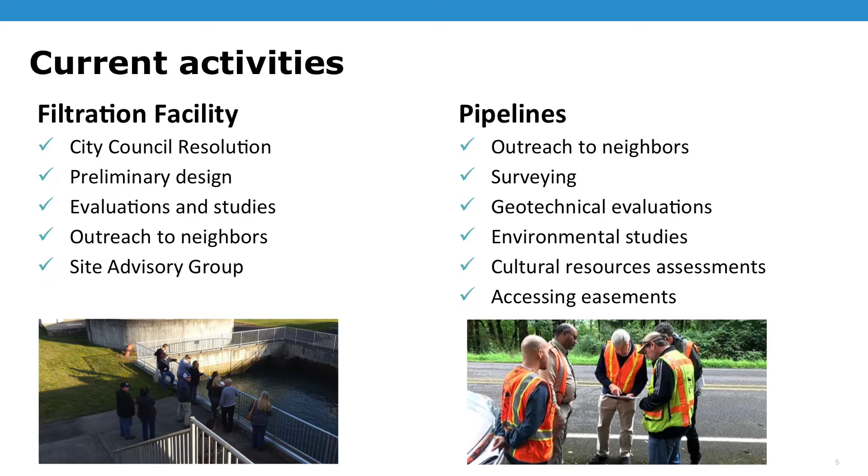So you may be aware of a number of the current activities on the filtration. As we've been out talking to a number of you, been in many homes talking about these activities, getting out doing geotechnical investigations, which are part of our evaluations and studies. We're doing the outreach. We've created this process to have your thoughts and input into our design, and we're getting ready to start our preliminary design.

So those are all topics that have been started over the past year, and now we have the opportunity to get into the actual design. That's the process now that we have the design contract under our belt, that we'll be able to begin to talk to you.

What we've been doing to prepare for an earthquake is creating a backbone. By putting these facilities, the pipelines and the treatment plant will be built to seismic standards that will withstand the major earthquake, giving us a section of our system that will be able to withstand that. Our goal, in the long run, is to meet the goals of the Oregon Resilience Plan, to have water back in that backbone within 24 hours of a major event. So these systems will be built to be able to provide that.

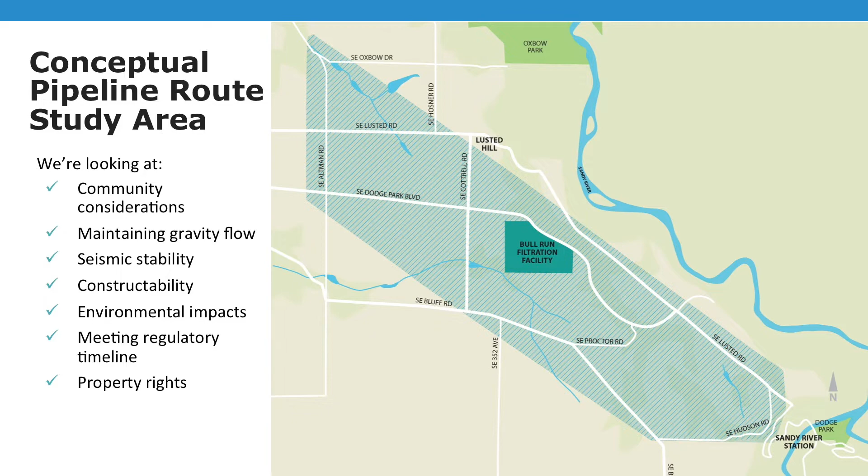I think that's... is there one more slide? Nope, okay. Do any of your pipeline alternatives involve property you don't have easements on currently? You've got several alternatives you're looking at. Do any of them go through land that you don't have an easement on? Potentially, yes. So I'm sure you've already connected with people that could be affected by that. Have you already talked with those people?

No, not all of them. Why not? We're still evaluating alternatives at this point, so we have not made any final decisions on where the pipes are going. We're trying to figure out what the best route for those pipes is. It's not exactly part of the process then, is it? You're not making the people part of the process, just hearing them after you've decided what you're going to do. No, we're here tonight to hear people's concerns. We'll be doing this for several more months before we make any final decisions on where pipe routes go.

This flyer went out with the idea that this is the group we want to connect with, so folks will be coming out and meeting with those individuals, talking to them and getting more information. We will be scheduling meetings with people to talk to them about getting on their property individually. Benita and I will be out talking to property owners. So nothing is set at this point.

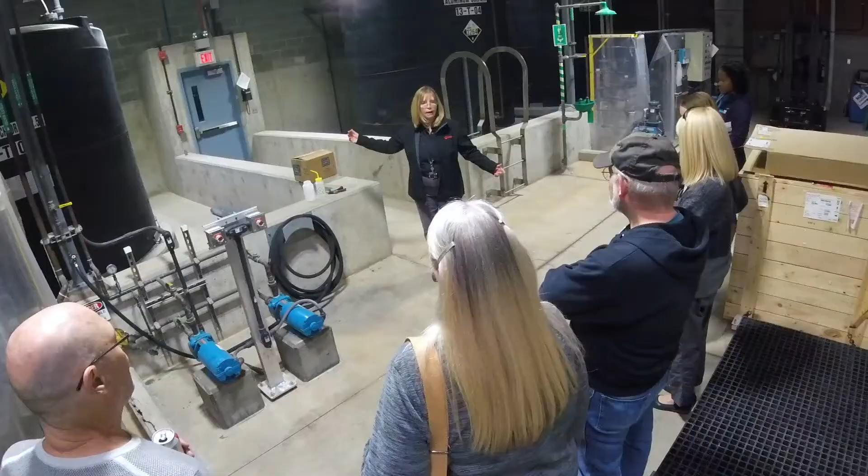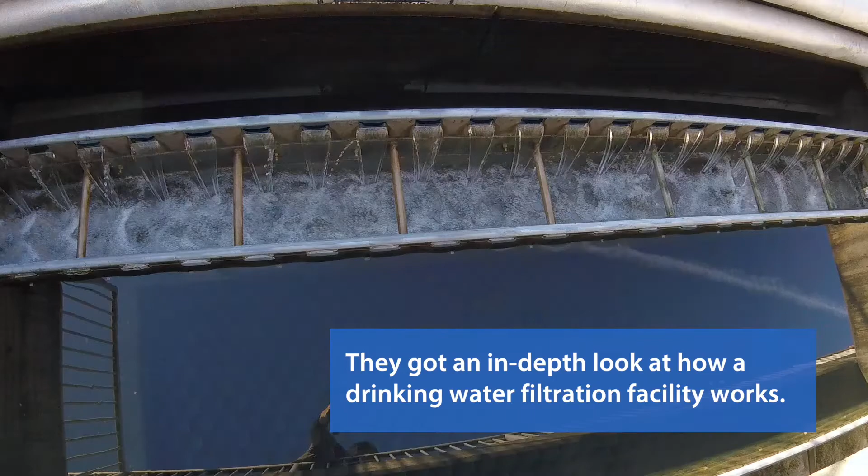Okay, so 1, 2, 3 of you. I don't know if you've seen these photos yet, but you may have. Maybe it was obvious, maybe it was just a little covert action here, but there is a very short video of some of you walking around that facility - this happened in November, is that right, Jude? Okay, and a number of you were there. Some people not currently with us tonight were also part of this conversation and introduction. So what I'm curious about is, as you refresh your memory about being there - it looked like a glorious day in November - what came to mind? What were some of the impressions you had leaving that conversation? Charlie, let's start with you - what was your reaction to this?

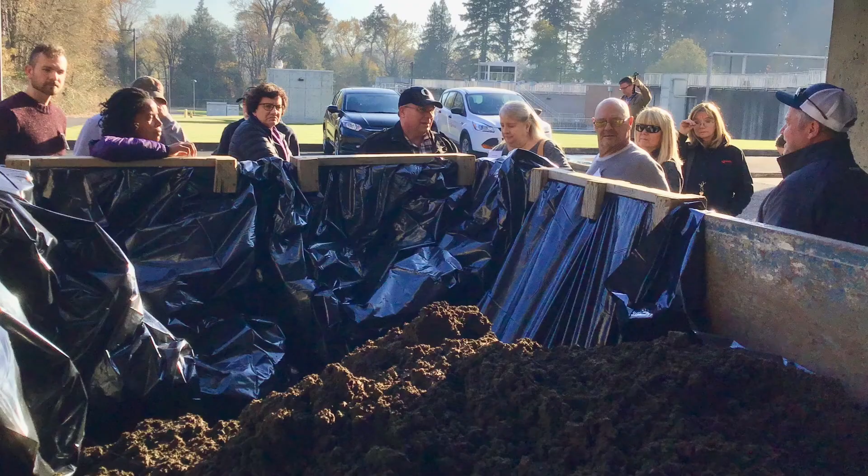This was a treatment plant that was kind of necessary. The things we were trying to highlight here were how to capture the neighbors' concerns and integrate that into the design, so people could understand how your input can influence the look and feel of this. I'd say the one thing I remember from my first meeting with you all was that you were sick of seeing the pretty outside of this thing. You wanted to see the inside, like show us what's inside this, over the fence. I think that was good, and people generally had a good opportunity, as Charlie said, to kind of see those things.

I think the look and feel of the plant that will be your neighbor can be very different than this. This was an attempt to bring people in and draw people to a park, have a water feature and public amenities that would draw people in. It doesn't sound like that's what you guys wanted to achieve through your input as part of this process, but again, it's just an example of what you can actually have input on and an impact on in terms of the water treatment plant.

Okay, great, let's go one step further then. Benita, I'm going to look to you to help with this. So there is a plan, as Jude inferred, to actually have another tour, likely on the 13th of February. And that was a date, right Benita, that this group thought would be an appropriate date to do? Yes, that's correct, February 13th, right before Valentine's Day.

And the idea is, the mechanical or logistics perspective of that is what? What's the plan for now? Well, we wanted to get an opinion on whether you wanted to look at something that was more similar in size to what our facility will look like, or if you're interested in looking at something that would be more similar in design. So we have the Joint Water Commission treatment plant, which is in a rural area, and that's what this one looks like. It's out in Forest Grove. Is that right? A little bit further than that.

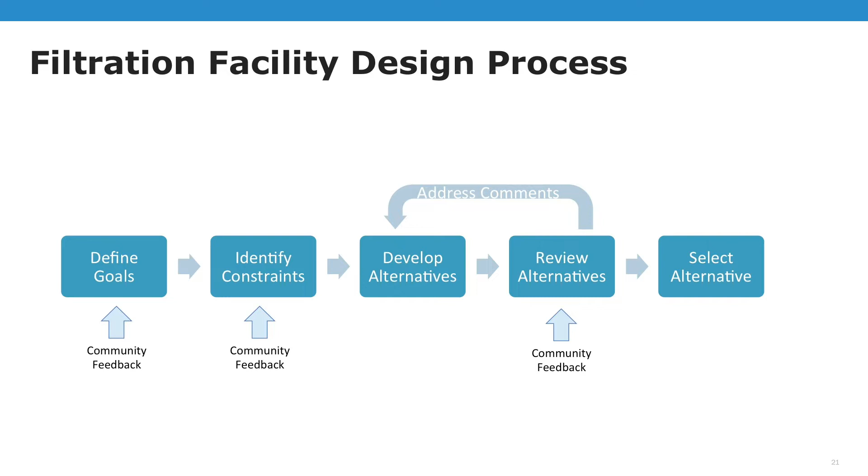The general design process we work through is both linear and iterative. We always start with defining the project goals. Dave talked about some of the overall project goals established at the start of the project, in terms of the values we bring to protecting the waters, the community, and the environment. At that point, the Water Bureau went out and got feedback from the community at large on the goals for Portland's Water Bureau's water supply.

We then work to identify the constraints: legal, regulatory, environmental, geotechnical, and community constraints that will influence the overall design. Then we move into developing alternatives and reviewing them, taking community feedback as we review the alternatives and iterate through that process, coming back if necessary to identify additional constraints with community feedback. Ultimately, iterating through that process, we end up with a selected alternative.

This is a very generic design process that works on the big scale with the overall project, and that we walk through on the small scale, even for medium-sized decisions. We'll talk a little about how we work through this process for one of the major decisions on this project: what the site layout looks like for this facility.

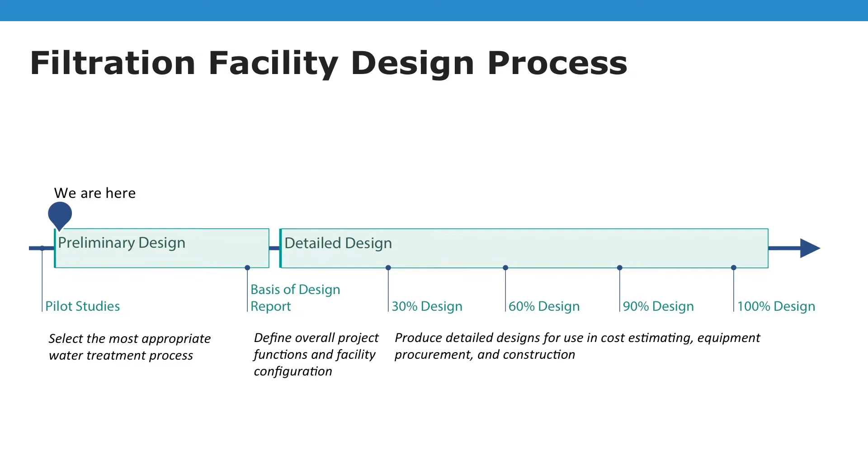The filtration facility design process is made up of two primary pieces: preliminary design, which we're just kicking off and will last about a year, as you saw in that schedule, and then detailed design. Below each bar you see in light blue the deliverables developed as part of this: the pilot study work that's ongoing now, the basis of design report, incremental design developments as the design evolves, and ultimately 100% design documents.

We're going to talk about each of these phases and a bit about what we're doing behind the scenes to make decisions, when and how we can solicit input from you all, and when we can answer the questions you've been asking that we just don't have the information to answer today.

The first phase I mentioned is the pilot study. The pilot's been up and running now for about six months. Pilot scale water treatment is really just a physical model of what the water treatment process is going to look like, with lots of dials to turn and bells and whistles so you can figure out the most optimum and efficient way to treat this water moving forward at the full scale.

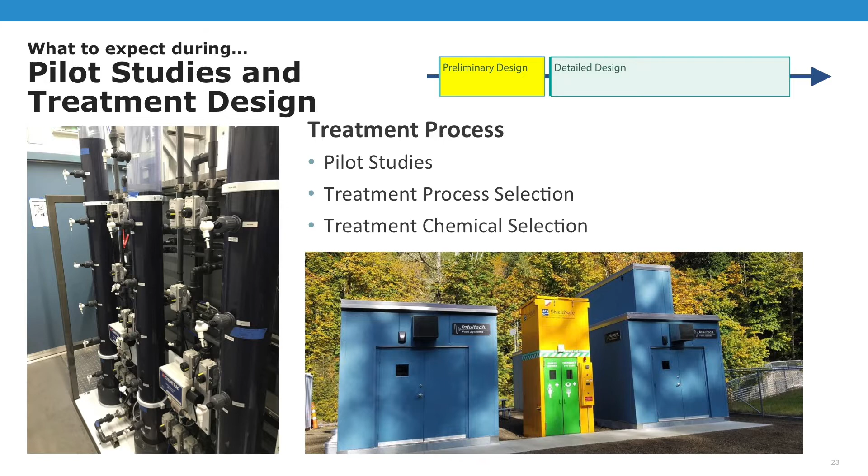These are a couple pictures of the pilot scale. It's literally located in these two blue containers with a safety shower in the middle. But if you open the door and peek inside, you'll see things like these pilot filter columns — 6-inch diameter filter columns that act just like the larger filters that will be built at the full-scale treatment plant.

Pardon me? We do have chemicals and things out there, so we want to protect the operator's health and whatnot. So yeah, if something happened, they'd have something there to wash their eyes or whatnot. Where are those located? Up inside the Bull Run watershed.

The types of things we're going to develop and determine as part of the pilot study include the water treatment process. We talked a lot about the different treatment processes, but there are all kinds of nuances with those, so we're going to iron out exactly what this treatment process is going to look like and demonstrate that it can treat water throughout a full year.

We're also going to select the chemicals we'll be using at full scale so we can understand the chemical doses, which equates to how many truck trips of those chemicals, as well as how many solids those chemicals produce and the solids we remove from the water — how many truck trips of mud we're going to be hauling off this site.

If you were using UV and/or ozone, like other major cities on the West Coast, how many truckloads of crap would we have to haul out?

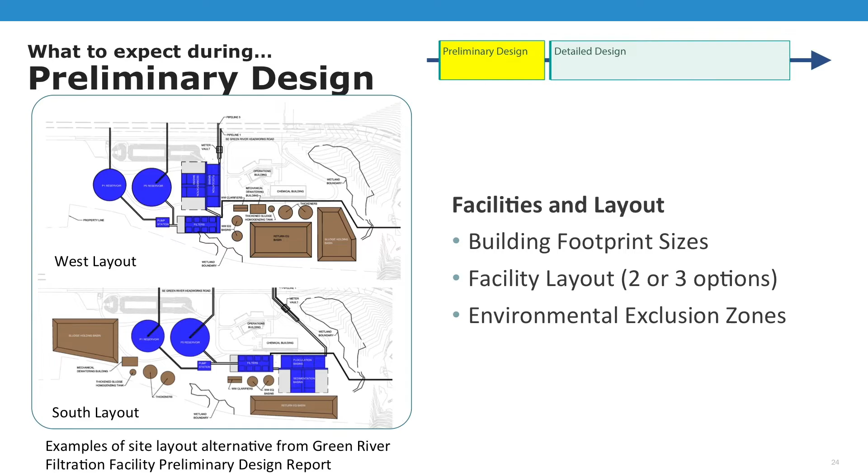As we move through the design process, especially during preliminary design, one of the key decisions we're going to explore is how we lay out the site. I've got a couple of examples of where we ended up at the end of the preliminary design process for the Green River filtration facility, a facility similar to what we're proposing here in Portland. Looking at two very different site layouts, but both fit within the same constraints. Both layouts had all the same facilities, just arranged a little differently. They both avoided the wetlands on site and stayed within the property boundaries, which are kind of washed out in the slides as projected.

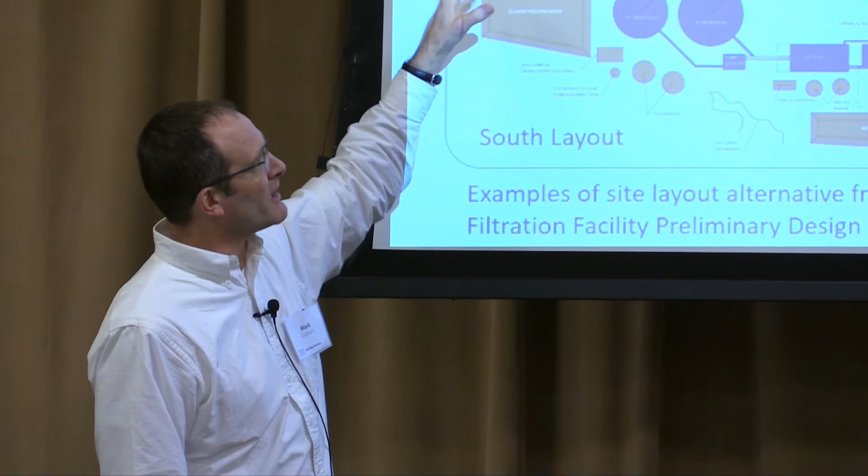So as we walk through the process of doing a site layout for this project, just like the generic design process we showed before, we're going to identify the constraints, where our environmental exclusion zones are, our goals, what our building footprint sizes are, and what we need to put on the site. We'll end up with two or three options for the Carpenter Lane site that fit all the facilities we need, which we can continue to discuss and optimize as we move forward.

Mark, yes ma'am, the Green River site—is it on 25 to 30 acres? Yes, I think that's what it was, I think it was 30 acres. It's at the headwaters of the Green River project, which has a smaller dam than the Bull Run project, correct? Yeah, it's just a small diversion dam, not a storage dam—the diversion feeds the Green River filtration facility. Behind that, higher up, there's a storage dam operated by the U.S. Army Corps of Engineers. It's also gravity fed, 42 to 46 miles to the city of Tacoma. Yeah, that sounds about right. Okay.

I feel like I'm getting cross-examined.

Clarifying, yes, somebody who has worked on a project at the headwaters that did not require 96 acres, it required 25 to 30 acres, and was completed in a 2-year period at a $30 million savings when the original budget was $250 million. There are differences: this was an existing ozone plant that wasn't meeting the city's needs, with chemical facilities and operations infrastructure already in place, so it was an expansion of an existing facility. You had to build around an existing working system to install it, and there was no break in service to the city of Tacoma.

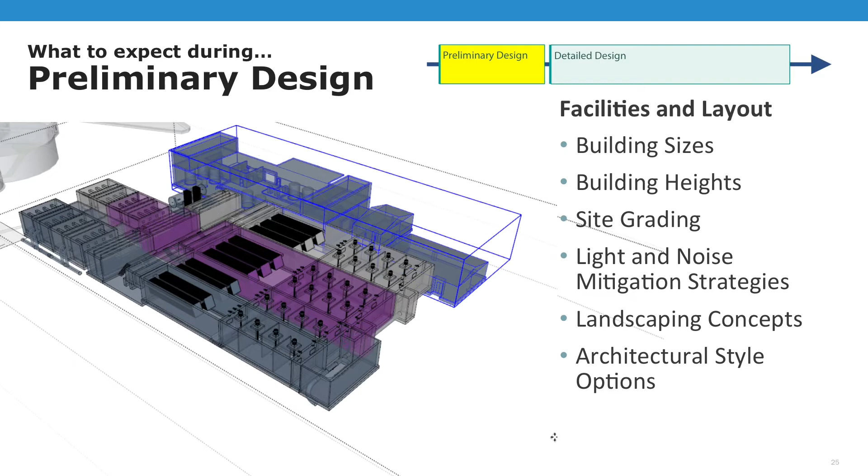As we go through and look at the site layout, one of the tools we use is 3D modeling techniques to look at various options. This is an example of a model we built for a new water treatment plant we studied in Eugene, Oregon, where we were able to rapidly visualize changes to the site layout, building sizes, building heights, grading, light and noise mitigation strategies, explore landscaping concepts, and look at architectural style options using these design tools to communicate with stakeholders, whether operators, community members, or regulators interested in the project.

The results of the preliminary design are typically the basis of design report, which memorializes all the discussions and decisions that were made, all the answers to all the questions we can answer at that time. It includes preliminary site layouts, often some visualizations.

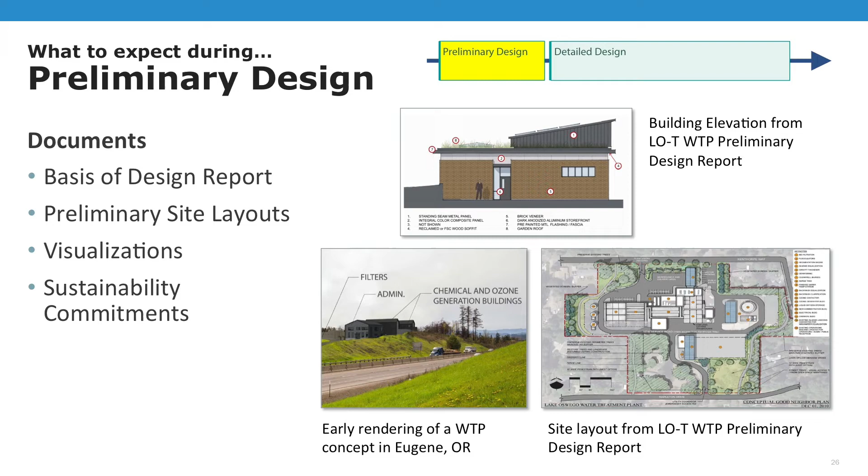Mark mentioned the plant for Eugene Water and Electric Board. This was a visualization we used so people could see, as they drive by I-5, what this plant looks like perched up on the hill. We took that from a lot of different angles. We also mentioned the Lake Oswego Tigard plant earlier. This was one of the building elevations so people could see the look, feel, and architectural style of the buildings being installed as part of that water treatment plant.

What's the architectural style of the chemical storage facilities? Do they just look like a big chemical drum sitting there like everything? No.

Typically we put a lot of our chemical facilities indoors. Certainly at this plant, our chemical facilities will be located indoors in double containment with good separation, ventilation, and all those kinds of things. So the architectural style of the chemical building often looks and feels a lot like the architectural style selected for all the other facilities. Jeff is going to speak a little bit later; maybe you could ask him that question directly at that time.

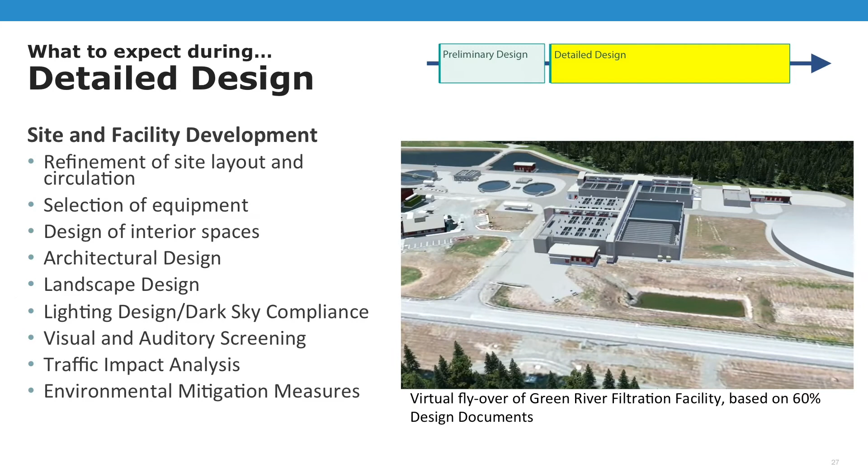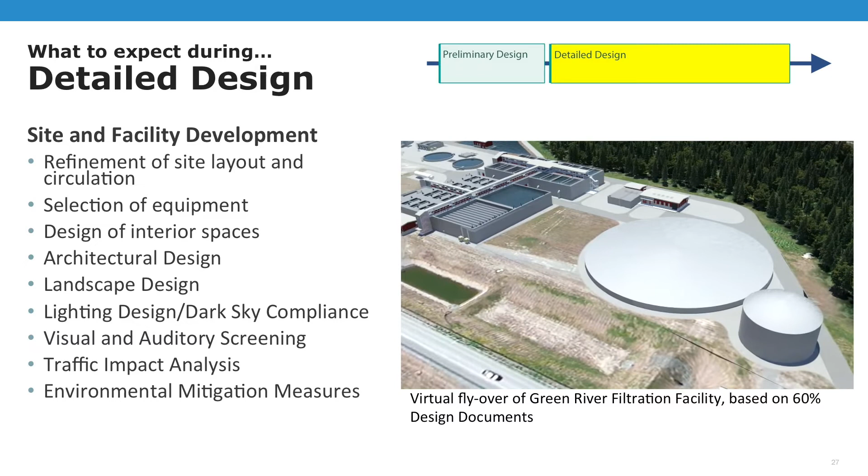As we move out of pre-design and into detailed design, we really start putting flesh on the skeleton established during the preliminary design process. We refine the site layout, circulation, and locations of the buildings. So the two site layouts I showed before, this is a 3D visualization fly-through of the plant that we put together based on the 60% drawings, using the 3D models we developed to interactively decide on the site layout and give an idea of what the overall facility will look like. Like Jane mentioned, this is about a 30-acre site, very similarly sized to what we would have up at the Carpenter Lane facility.

So we will continue the detailed design with selection of equipment, design of some of the interior spaces, the architectural design, our landscaping design. We can do lighting simulations that will show what the impacts would be to the community, identify what sort of visual and auditory screening will be effective at the site. And then we can start looking in detail at the traffic impact analysis, both for the construction phase of the project and the ongoing operations and maintenance of the facility, and evaluate the effectiveness of our environmental mitigation measures.

Can you expand on the dark sky compliance there? Is it totally dark at night? No light pollution? No, the dark sky is... Jeff, I don't know if you want to describe what the rules and regulations and the initiatives to maintain the dark sky are. Okay, he'll have it up.

But no, it isn't going to be an invisible site. If you fly over the site at night, you will see this facility. Floodlights are actually not allowed in general, except for emergency, security, and maintenance. So this is an area of real concern, and a lot of design effort goes into minimizing it. But we can't promise that you won't know the facility is there at night. It will. It is a large facility that you will have some impact on the sky.

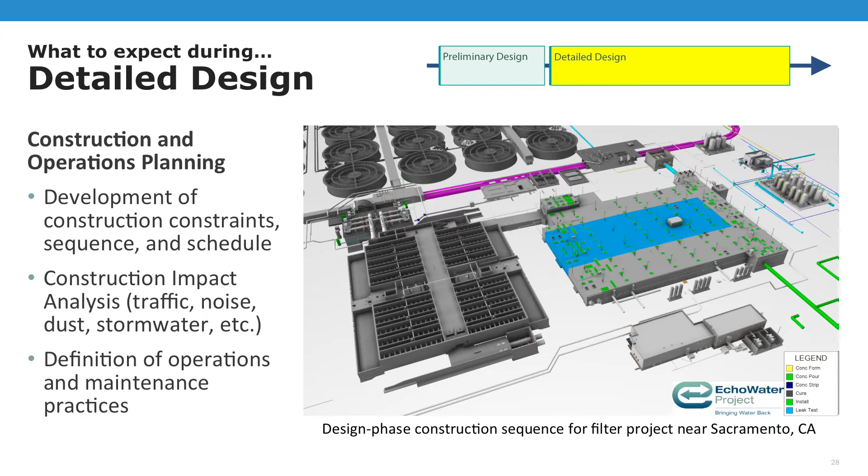This little video here shows you a filtration facility that was constructed recently in Sacramento. It's just a time sequence of when things are going to get built to make sure we don't have contractors working over the top of one another and whatnot. Typically, we understand from these types of things the construction constraints, the sequence, and ultimately the construction schedule, to help give clarity on that to you all. We can better control and have a better understanding of the construction impact, like traffic, dust, noise, what are we going to do with stormwater, those types of things, and ultimately the definitions of the long-term maintenance and operations of these facilities.

I think it's yours, Jude. And the punchline to all of this is the engineering contract documents, which I think for this plant will be something like 1,500 drawings and probably about 4,000 pages of specifications that articulate exactly the vision that we've come up with, and we hand that over to a contractor.

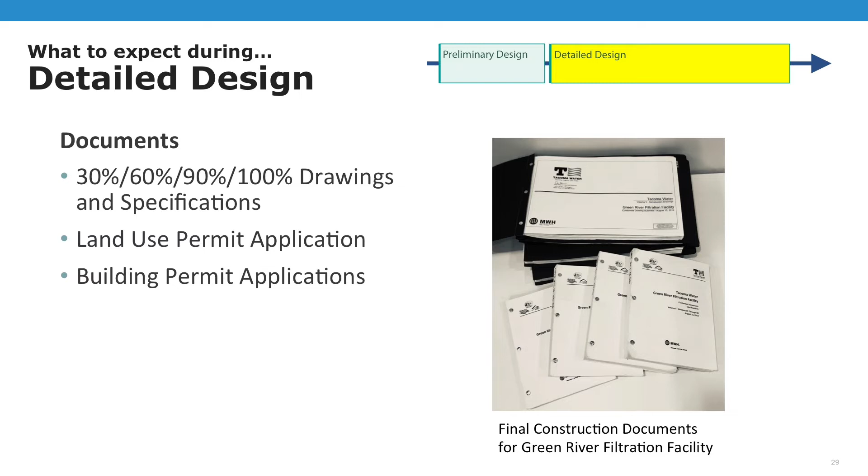This project, we're fortunate enough to be delivering through a methodology where the contractor is actually going to be on board working with us all through design so that they understand what's going on and what the constraints are out on the site, and also how do we design this system to make it more safe both during construction and long-term operations. We use various submittals to get things like land use permit.

Typically, we submit for land use permit with about 30% design, kind of conceptual design, where the building heights are locked down, the architectural features are locked down, and then ultimately with 100% design, we go and get the building permits.

So this is an overview of just one portion of the project schedule, the detailed design that Jude and I are very excited to be working on, and working with the Water Bureau and with the community to develop a great project for the long-term protection of the Bull Run water supply.

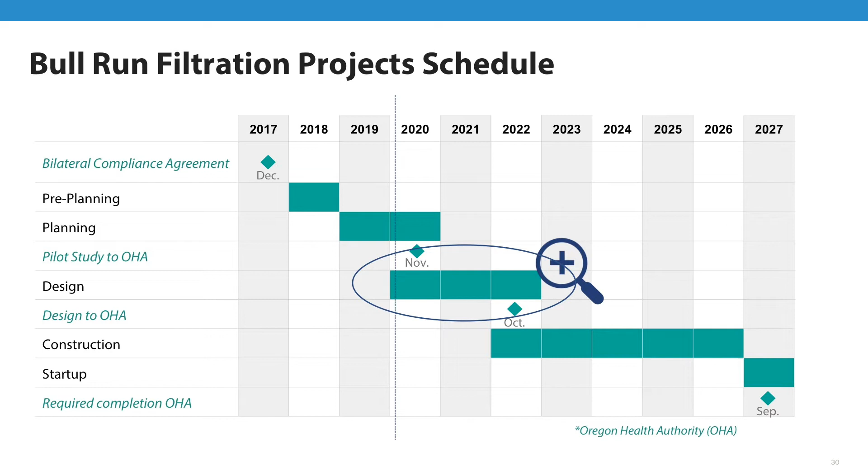I think, what's our next slide? And do you want to? Just again, I hope that we were able to help you understand when we can answer these questions and when we're going to have the details. If you have questions, and even though we don't have specific answers now, if we can find creative ways to find analogous situations in the community now and share that with you so you can start understanding what those impacts are, we're all for it. Let's just continue talking and we'll do what we can.

What's the noisiest thing that might happen during construction? Driving piles, digging. Look, you've been around enough of these projects. Sure. So what's the most disturbing thing that we would expect? I mean, pile driving is usually the worst thing for any community during construction.

If the recommendation is to use driven piles, that would probably be the loudest thing that you would have. There are other options other than pile driving, so that's something we would definitely look at. As we look at construction, I think pile driving would probably be very low on our list of construction techniques. Dynamic compaction of soils, where you haul up this big weight and then drop it to compact the soils, is a pretty loud thing.

At the Green River facility, we used stone columns where we rammed a bunch of rocks down in there to create columns. There's lots of noisy stuff that goes on at these construction projects. We will be working with the CMGC, the contractor on board, at about the time we get to pre-design, to identify better ways of doing these things, like using drilled piles where you have an auger and then fill that with concrete or steel to create your piles.